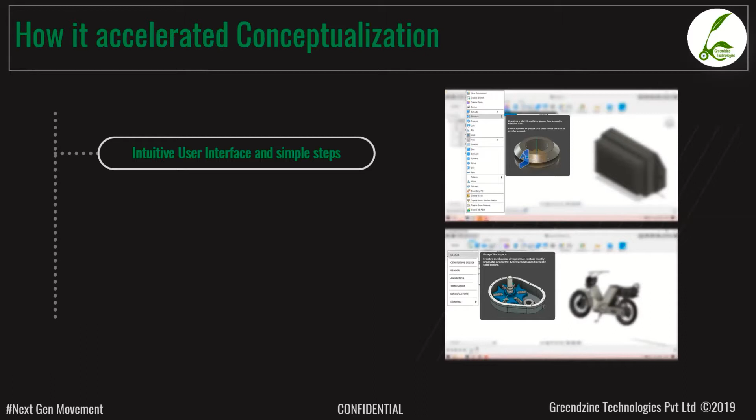Starting with Fusion 360, when I joined, this was the first software handed to me, and it took me no time to learn. Every option speaks for itself on how to use it, and the UI is simple, not complicated. Every option speaks for itself.

Your sketches have to go somewhere, and you want them a certain way, but modeling gets trickier with organic shapes. So we simply import the sketches into Fusion and get the organic shapes out of it, which is easy to sculpt and get the necessary shapes however a designer feels. Complex shapes in organic modeling are quite simple to get done.

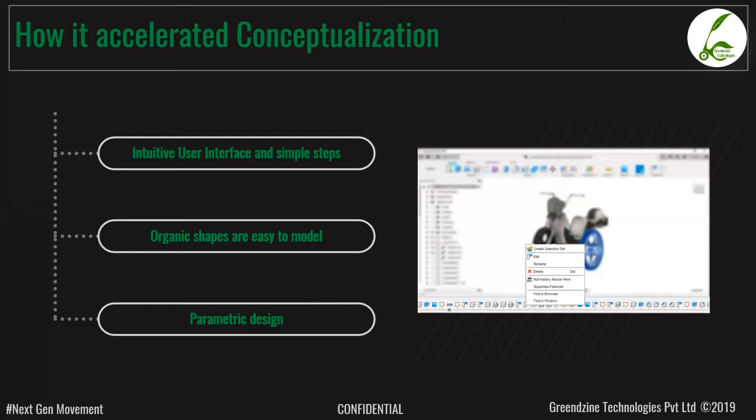And of course, it's parametric design. I can go into the assembly tree, change something I don't like somewhere, and the entire tree changes on its own. It's quite simple. So this is one of our prototypes, the first design we did to get it to look something like this.

It was a quick prototype that we did, and as an engineer, we have to present the model. So for rendering, there are lots of options to explore in Fusion, so that the rendering gets interactive and it's easy for the team to see what's going on in the product.

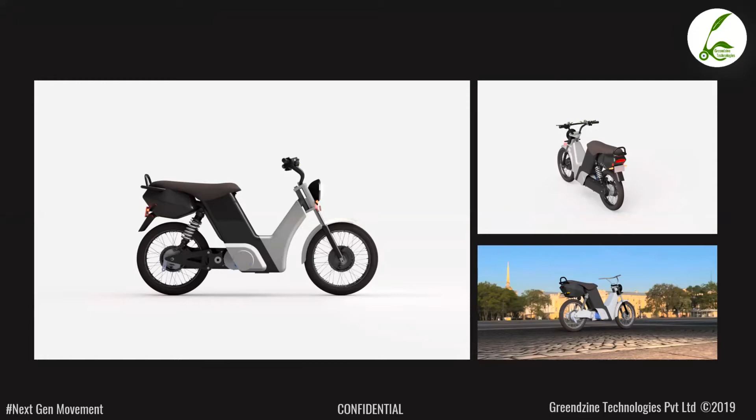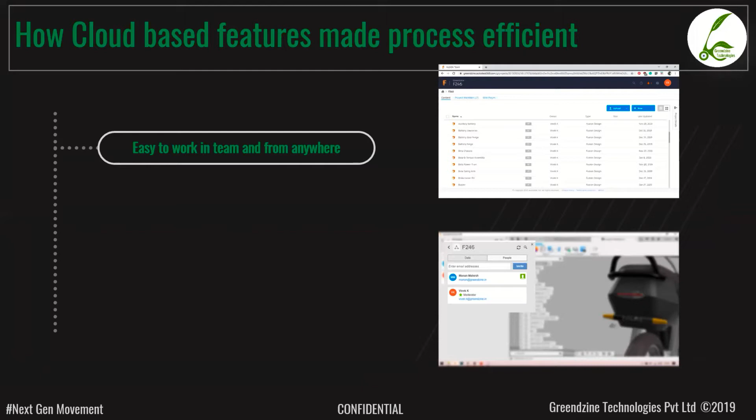Certain things we really enjoyed are the cloud-based features. I can work from place A, my office, and go to the vendor, let him know what's going on. We can make design changes on the go, and the team will know what's happening. We can work from anywhere. The cloud-based feature always saves time, since we don't have to upload heavy files to the cloud and download them. That hassle is totally eliminated using the cloud features.

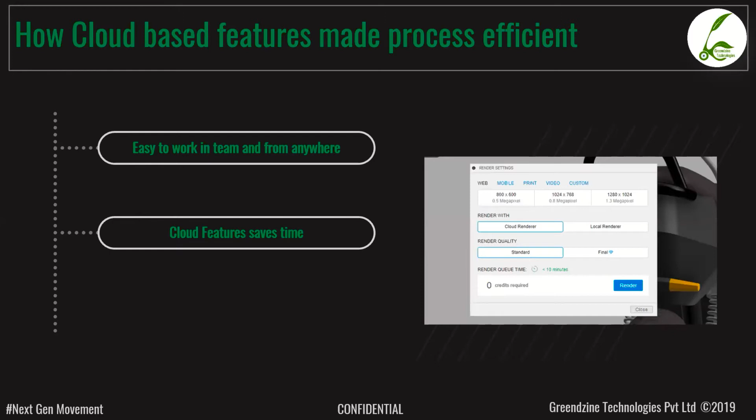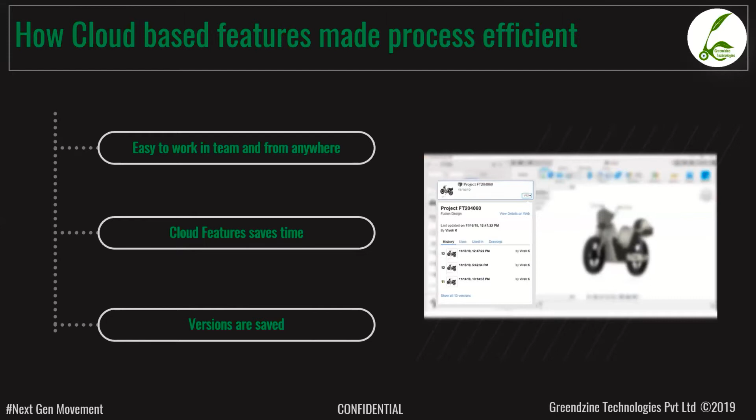As a designer, everyone will relate that there's always a file named Final Assembly 1, Final Assembly 2, and it keeps going on with no end. So this version control really helps us, since every time you save, it creates a version of itself. That's how Fusion helped us.

And then there's always the Autodesk forum. They're always fast and don't waste any time. They always reply to our queries fast and helpfully, and there are always productive discussions as well.

From the concept, it has to go to the engineering bit. From Fusion, you can move to any software, but most of it can happen in Fusion itself. You can simply convert the model into the engineering bit, and that's how the concept to engineering process starts.

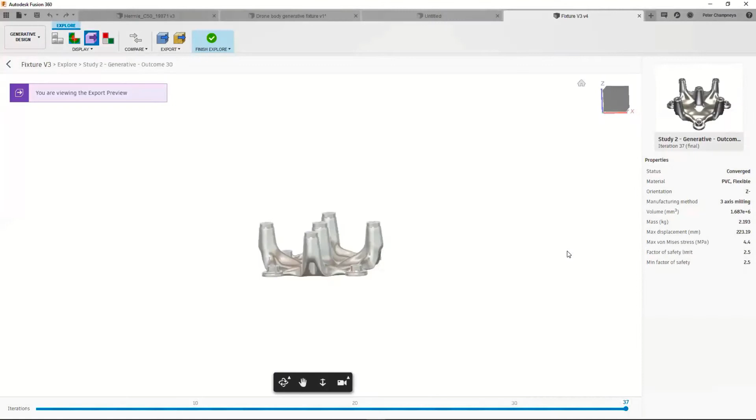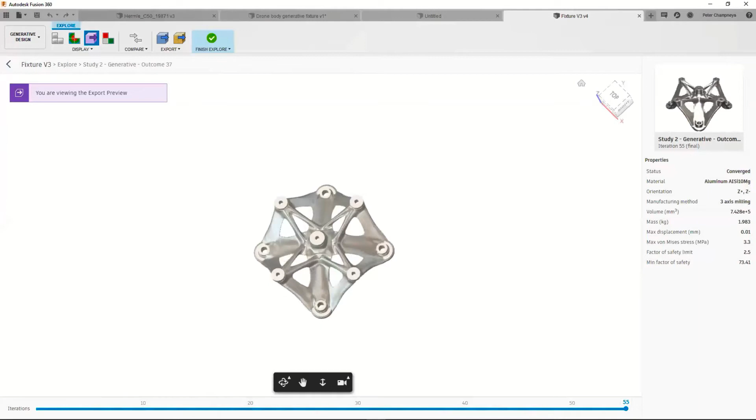What you're looking at here are the designs for a workpiece holding device - a part I'm going to use to hold a piece of metal on top of a CNC machine while machining it. The problem is that piece of metal has some undercuts, some areas I need to get into with my tool, so it was difficult for me to think about a way to clamp this thing efficiently on my machine.

What I did in that case was use generative design to create that geometry for me, to make sure I was able to reach all the parts of my design without having to actually think about it quite often.

Another area where we've used generative design effectively was in things like Roboy's pelvis area. You can imagine the pelvis has a lot of stress and strain on it, but there's also a lot of equipment inside that pelvis area. So it was difficult for me to imagine a shape that would fit all of that, and I used generative design in that case basically as an easy modeling technique to find the shape I needed to fit all those tightly connected parts.

This is something I think Greendzine probably understands - there are areas inside their bikes which are very compact, and if they made them larger to fit everything in there, it wouldn't be very attractive. So using techniques like this to pack everything closely together and keep packages small - I think this is a skill product designers should know about and should be using.

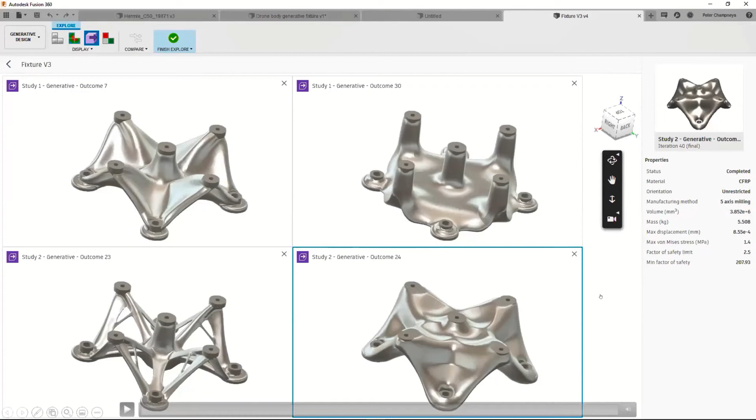All right, now let's move on to the next slide. This is one that most people think about when they think about product design - advanced surfacing techniques. One thing you should know is that Fusion combines both parametric mechanical engineering workflows and non-parametric industrial design surfacing workflows. In fact, that is the origin of the name Fusion 360 - it was a fusion between the non-parametric industrial design world and the parametric mechanical design world.

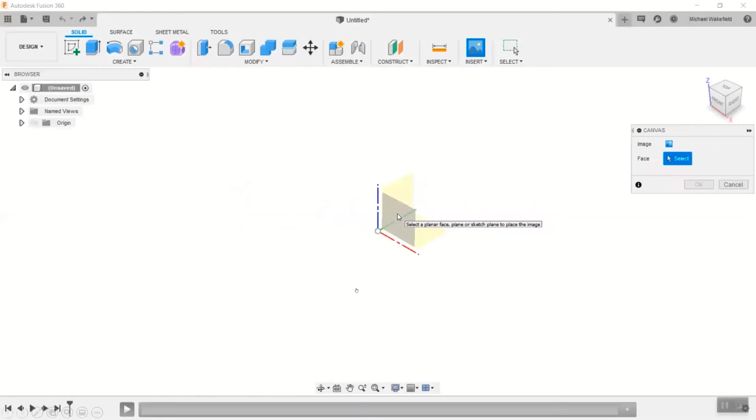A lot of people don't know that, but that's where the original name Fusion came from, because generally, even to this day, surfacing tools for industrial designers work non-parametrically and are not compatible with parametric mechanical engineering tools. They have import-export capabilities, but nothing like the ability to transfer feature information back and forth. So when we created Fusion, this was one of the original things we thought about - how to make that different. There are usually two camps in Fusion: those who know industrial design and our surfacing capabilities, and mechanical engineers who never touch it.

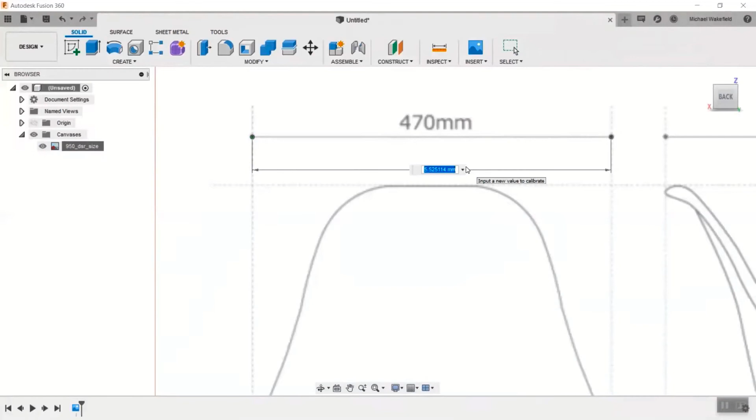So everybody's working in their own camp. What I'm suggesting today is that we have the ability in Fusion to do both and learn it, because it makes for much more attractive products.

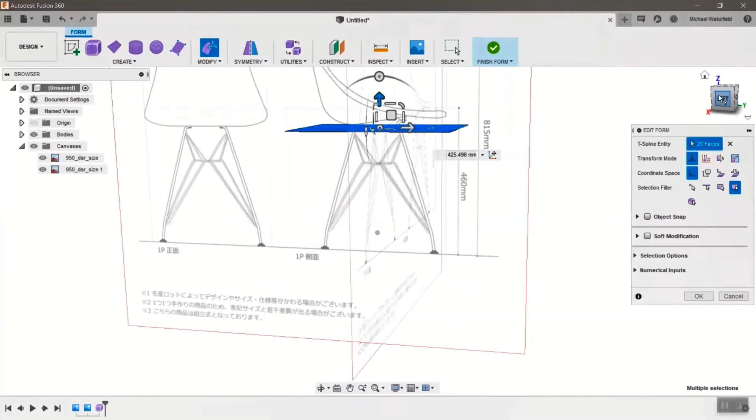What you're looking at here is the classic Eames chair. A standard workflow in Fusion is to create a canvas using pictures - this one is a really nice picture I pulled off the internet, because you can scale the picture to the actual size of the chair using those measurements. I think that's a nice way to do it. Basically what I'm doing here is, in our T-spline environment, I'm creating a surface.

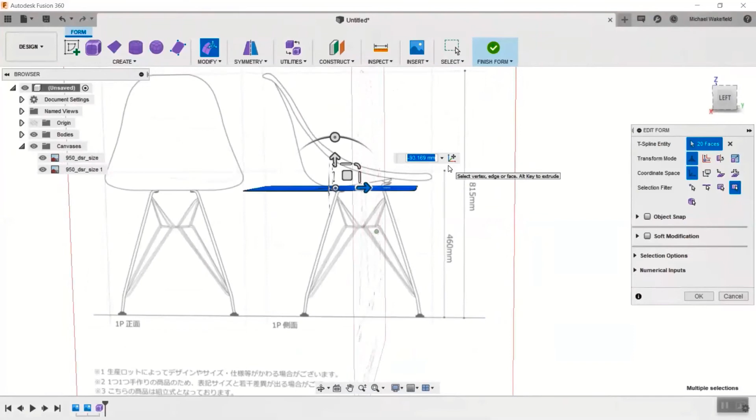It takes a little practice to do, but once you get this, you can get amazingly complex shapes that are very smooth, very attractive.

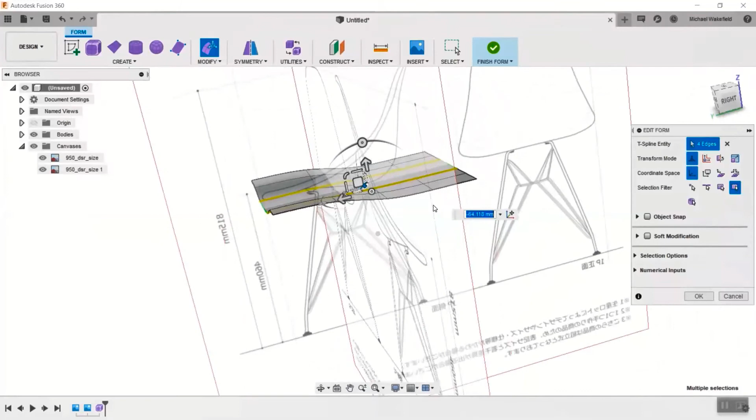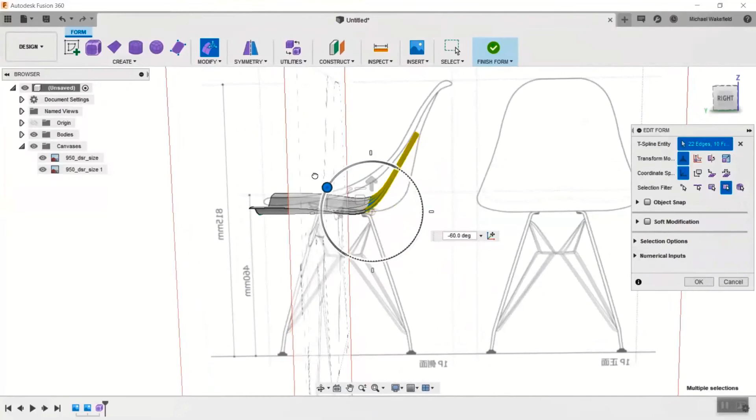Now, I have seen engineers go out there and try to design things like eyeglasses, motorcycles, chairs or sofas, any number of things using parametric design workflows, and they tend to look very square, very blocky, not very attractive. And you can see by using some of these techniques here, I can get to this shape in a fraction of the time.

And that shape is much, much closer to the original. In fact, it is how the original was made. They were made using these surfacing techniques on other softwares.

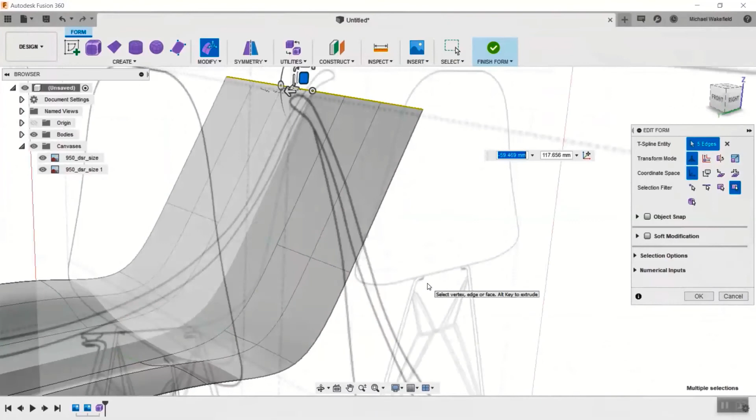The advantage with Fusion is, because it's part of the entirety of the software, I am able to actually use parametric design workflows afterwards to describe bolt connections, the legs on the bottom, things like this. And you can see it doesn't take long and you start getting a really attractive shape.

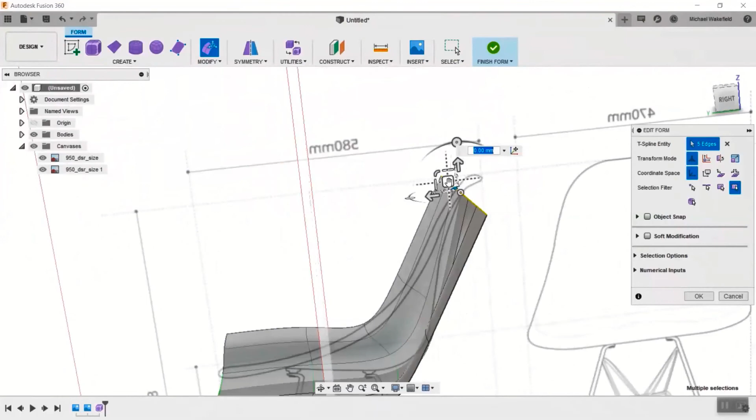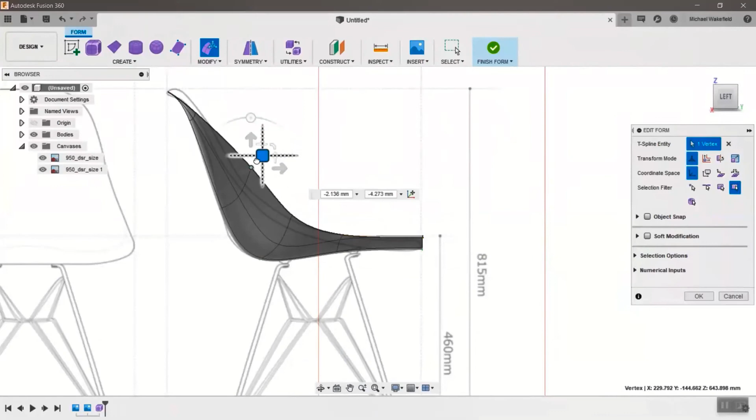Now, some of you are saying, I can't do this, I don't know how to do this. But this video is on my YouTube site. It's a long form video, about 15, 20 minutes in length, and I go click for click through, so you too can learn how to model the Eames chair in a way that will make all your friends amazed at your surface modeling techniques. It does take a bit of practice, but I encourage every one of you to learn it, especially mechanical engineers who may not have experience in these surfacing workflows. Fusion gives you the opportunity to learn those.

So let's move on to the next part that I think is really important for product design. Really, these days, just about any kind of embedded product design you're seeing out there combines electronics. A lot of people don't know that Fusion has a completely integrated PCB design portfolio inside of it.

You can look here, this is one of our customers in Germany, Festool. They make the Lamborghini of construction tools. You can see they use a lot of those surfacing workflows as well to get some of those organic shapes, combined with the parametric workflows to do strengthening ribs and spaces inside, which is really nice.

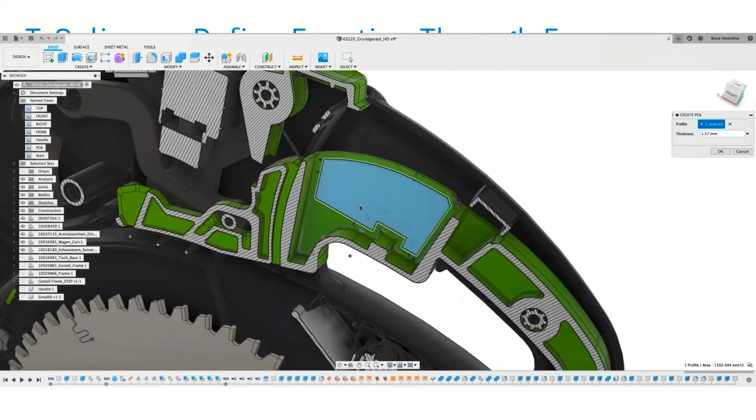And then they can create a PCB, which has the layout and the schematic, and then they can actually do their pick and place kind of operations, just placing the components on the board. Routing happens automatically using auto routing features, which is just amazing. The amount of time you can save here is just amazing.

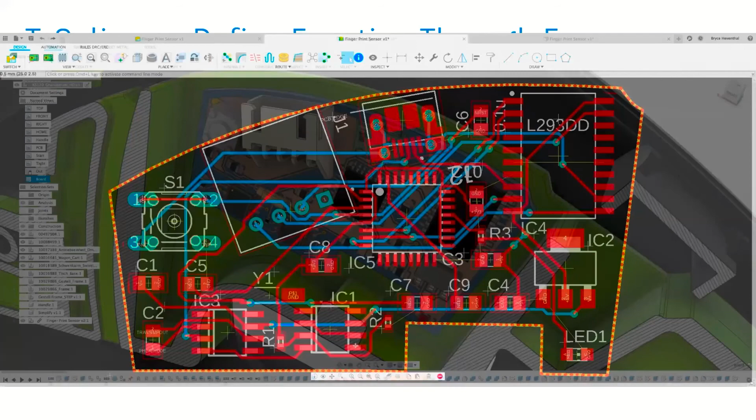The software goes through and figures out how all those things fit. You get out of that a 3D model that has feature information. Each one of these little blocks actually is a separate body. It exists as an assembly in your assembly. You can see it here on the left side if you look closely.

And these are not import-export decisions. You are still part of the original Fusion software. There is no separate software, no separate data format. And that is particularly important because I'm going to show you the next thing.

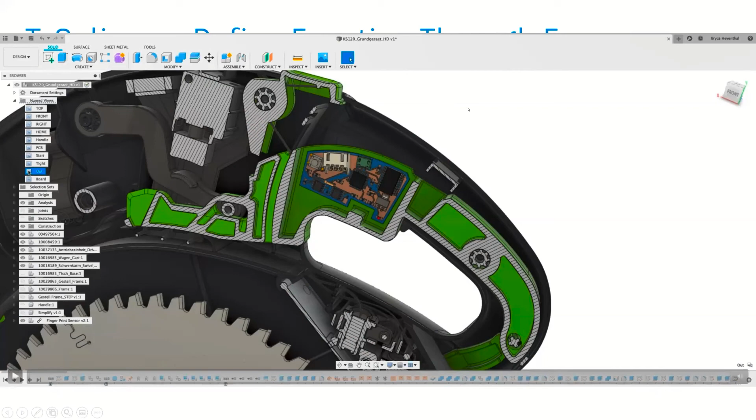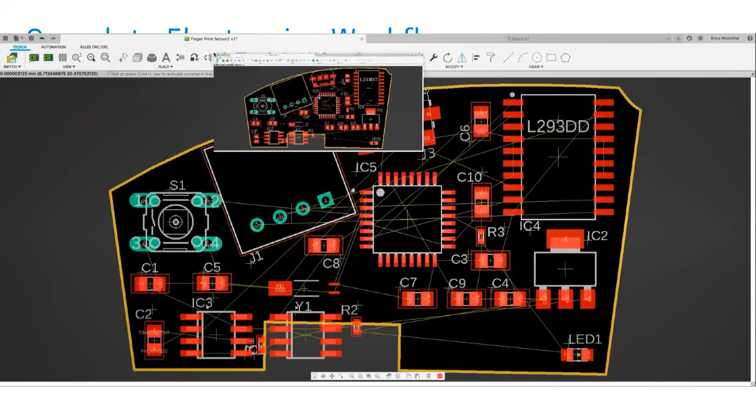Let's go to the next video, which is really just a continuation of the first. If we have a fully integrated PCB and we make a change to our 3D model, like here at the bottom, that knob over to the left side, you can see that the PCB no longer fits normally on a regular software because those are two different worlds. But I can then push things over. The reroute takes care of it, gets everything done automatically, and then you have a new version which now fits.

The point being is that in an integrated product, you should have integrated product development products, and Fusion provides you with those. Electronics is one of the ones we're most proud of because it's one of the ones that most of our competitors don't have. But we have electronics, we have CAM, we have rendering, we have simulation, we have generative design, additive manufacturing, and a number of other environments.

With Fusion, we are truly able to take companies like Greendzine from zero without ever leaving the software, and everybody can work together.